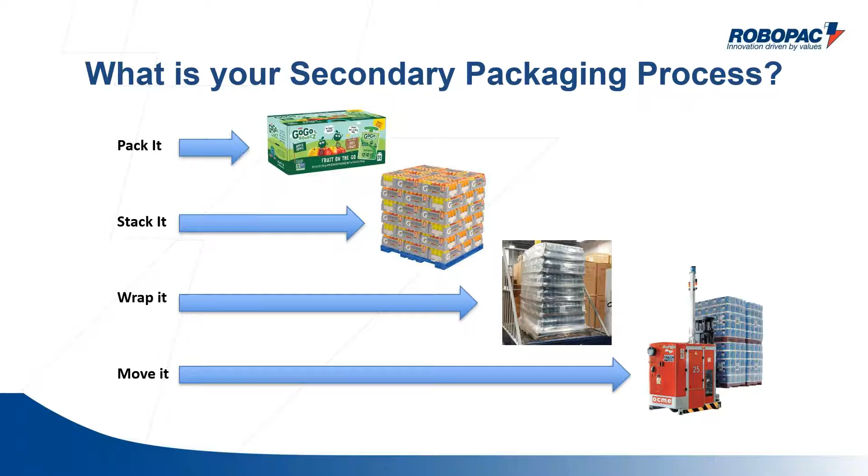In each one of those categories, I'm going to show you some features we've tried to incorporate over the last several years to make automation of these processes very flexible, user-friendly, and operator-friendly. So why would we automate case packing?

Case packing traditionally in the US can be done in an RSC style case, a bliss case, a tray, or a wraparound case. A lot of our equipment focuses around the wraparound case, tray and film packing, or film only type bundling. In the past, you could manually pack cases with a large workforce, bringing product, manually placing it into a case, and advancing the case to a sealer. Under today's circumstances, even if you can find the labor, with social distancing and everything else prevalent in this pandemic, it's just not feasible or practical to manually pack cases.

So what are your considerations to move from a manual operation to an automated one? What do you need to be successful? A lot of time when we think about flexible automation, our mind drifts to a robotic work cell that is very highly flexible. But typically what you give away to do that type of automation is throughput capacity, and many of you probably have throughput requirements that robotic work cells may not be a perfect match for. So if we look at a traditional case packing machine, what's important to incorporate to make sure it's flexible and user-friendly?

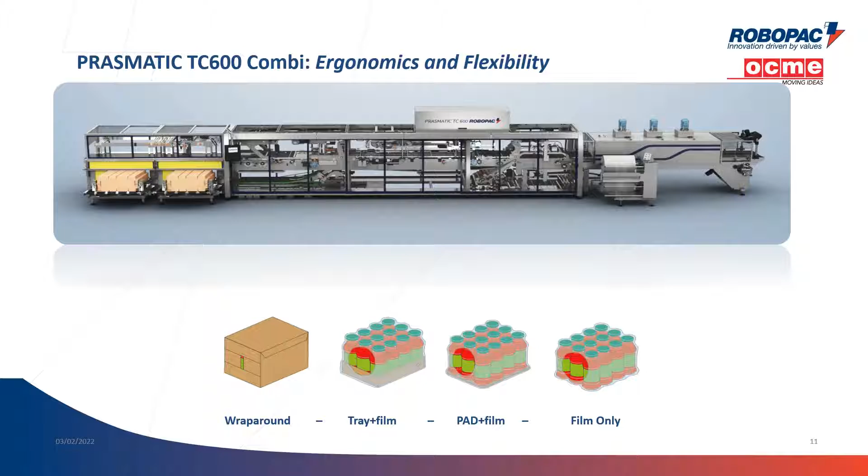I wanted to talk about one machine that accomplishes that, our TC series machine. We call it a combi machine because the combination of formats it can run is very wide. A machine like this can run not only a wraparound case, it can run a tray and film pack, a pad and film pack, or a film only pack. This machine can run all those formats without needing multiple dedicated machines, and with a servo changeover, you can accommodate quick changeovers from one format to the next.

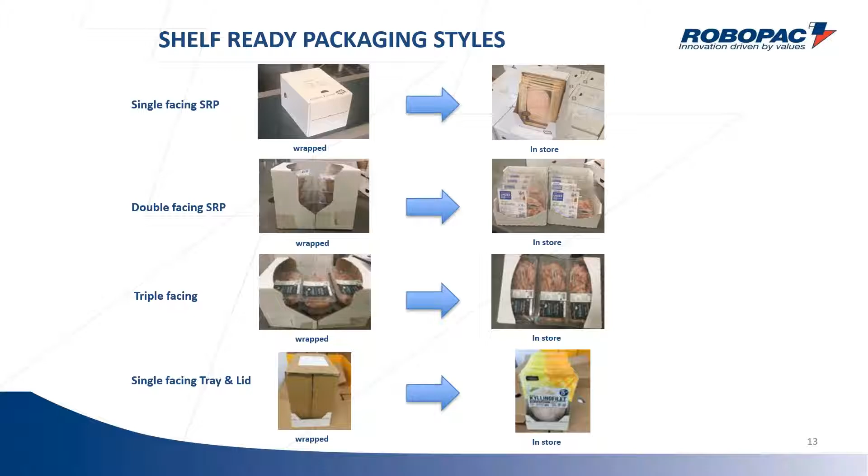The other thing we've really been pushed to do in these wraparound type case packers is provide shelf ready packaging. That seems to be a big push, and I've worked with several people in your industry looking to provide their customers with these shelf ready type packs. Just to give you an idea, here's a nice 3D animation of how this machine is designed and some of its design features.

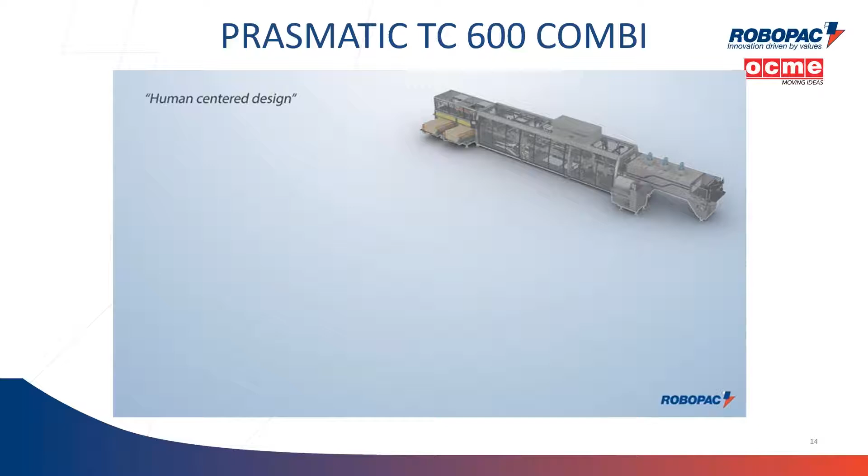About 6 years ago, we really sunk our teeth into this concept of flexible automation, so we made the machine more user-friendly. Things that were very simple in design but made a huge difference, like widening our machine frame, which we did to accommodate some automation but also to make it easier for operators and maintenance people.

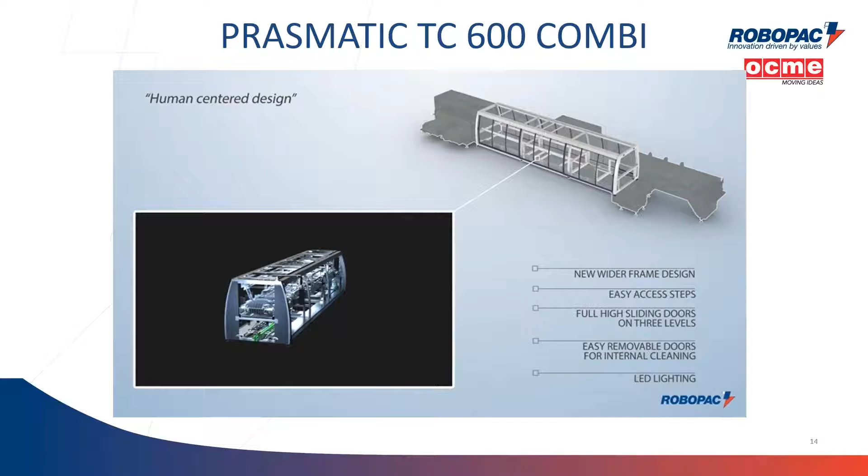Simple things like putting steps inside the machine for better access, and full-length sliding doors that open all the way to expose two-thirds of the machine for maintenance in food and beverage environments, making those doors easy to take off for cleaning. All the machines have LED lighting too, because even in a very bright, well-lit factory, the inside of a machine can be dark. All these things help operators and maintenance people.

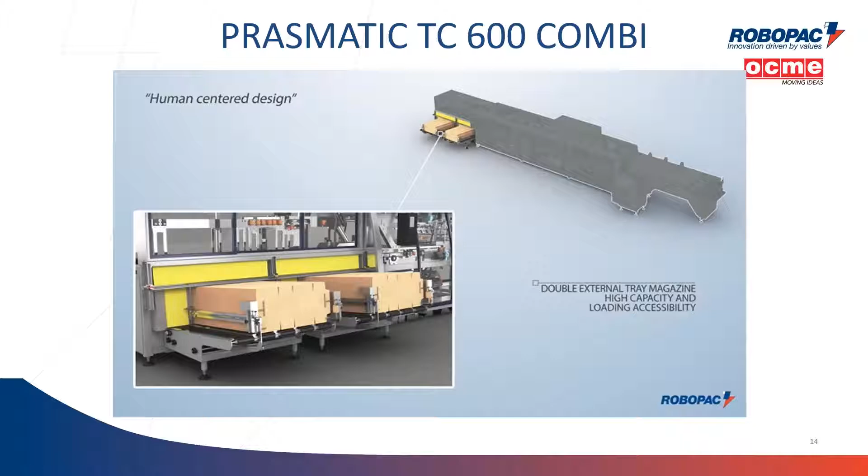We also looked at how blanks are fed into the machine. We use a 90-degree dual magazine that allows you to put blanks on the machine as it's running.

Taking the film rolls outside of the machine and providing a system for automatically splicing film tails, you don't have to stop the machine to change rolls of film. As one roll expires, the film tail is welded to the new roll.

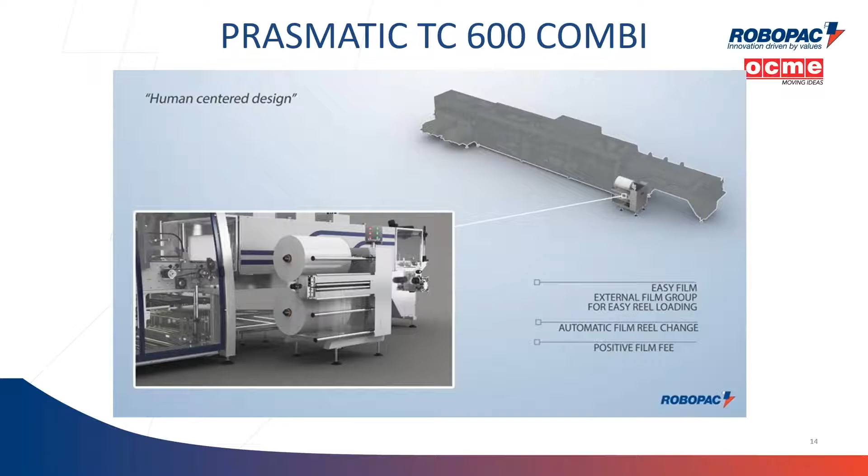All of that is controlled with servo motors, so you have precise tensioning of the film, again making it user-friendly and maintenance-friendly.

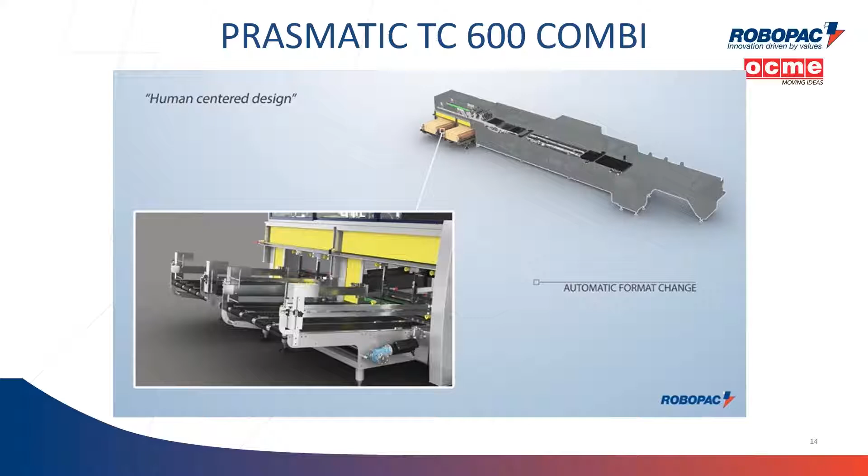There are a lot of changeovers to be made when you're running multiple formats, so we incorporated a servo-driven automatic format change from the HMI.

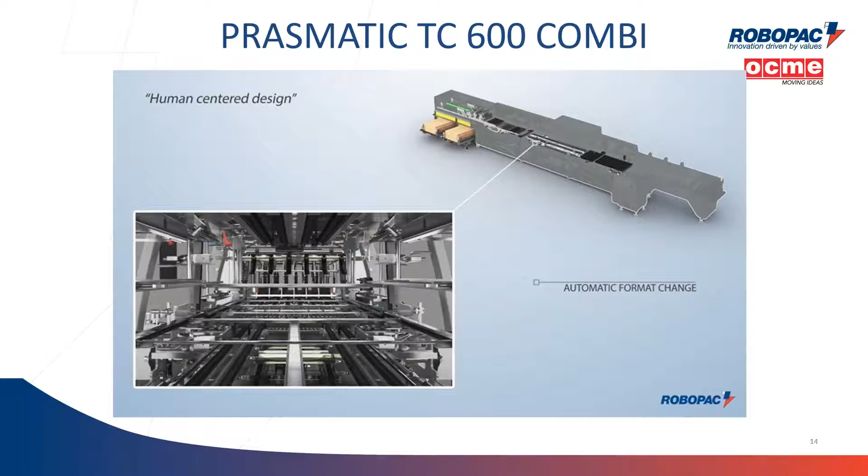We can control the magazine dimensions, the channels or lanes the product goes through, the widths and height dimensions, and the pitch of the chains, depending on your product size. All of that is programmed in advance and called up with a touch of a button.

One of the other things we do: all machines have wear components on a packer like this. The knife that cuts the film is one of those. We put it on a THK guideway system so it can be pulled external from the machine very easily and changed in a rapid amount of time.

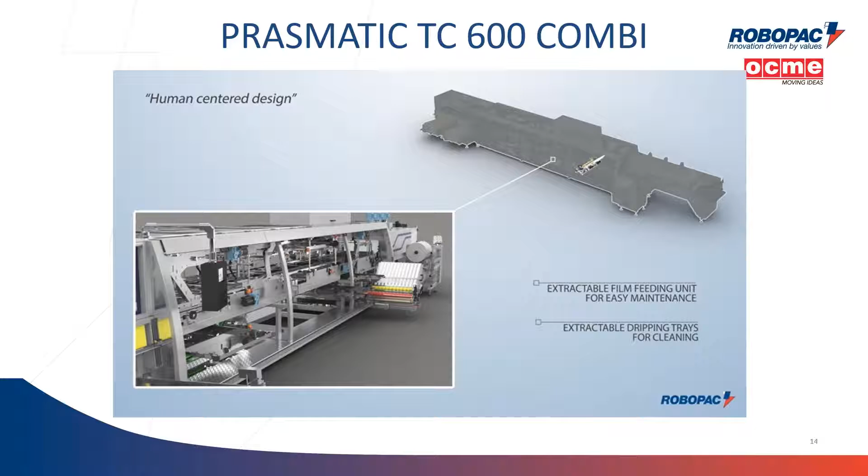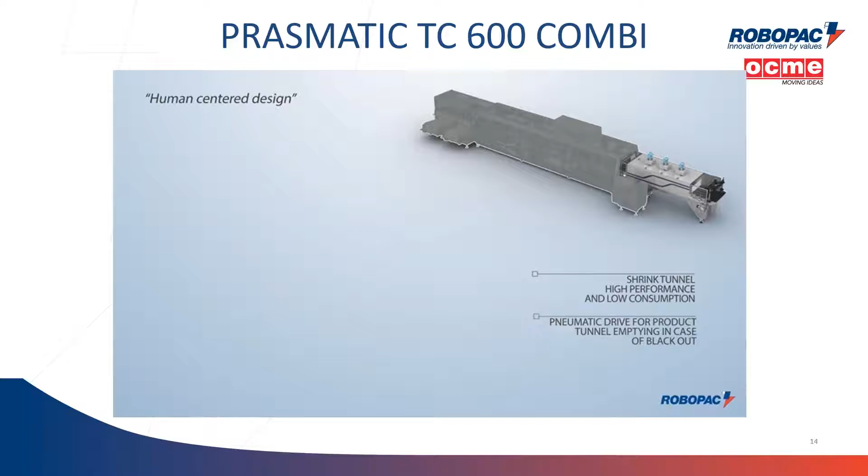So again, the flexibility we're talking about is the flexibility of formats and the flexibility of ease of use. This particular machine has a very high efficiency tunnel with a pneumatic motor that will kick on if the machine happens to lose power, so you don't have any problem.

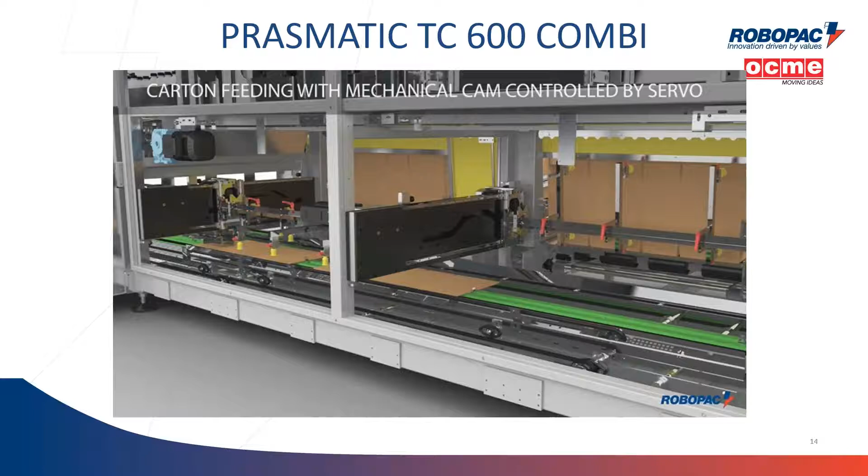As we watch the rest of this video, we'll see a servo picking device picking, alternating from the two different blank magazines. This first segment shows the machine running a wraparound, a full wraparound corrugate case.

Then with a quick changeover, we can go from a full wraparound case to the next format we're going to take a look at here, which would be our tray and film type format.

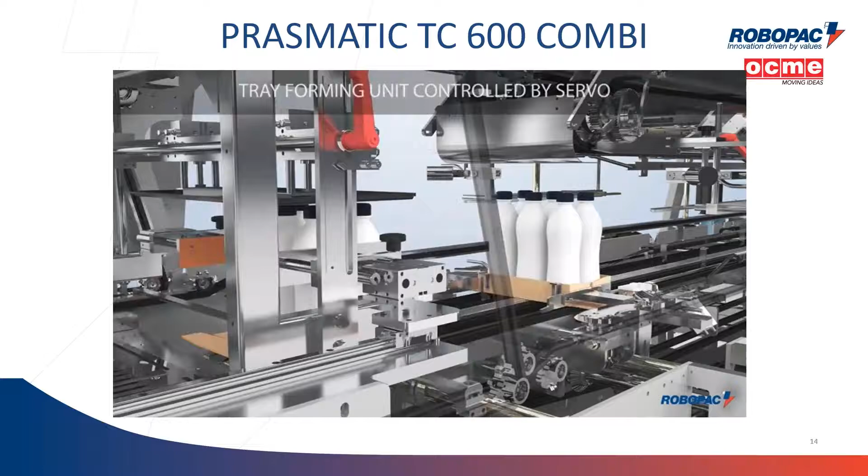All of these formats are very, very popular in the food and beverage industry in particular. Now the same machine that ran a full case is running a tray with a film overwrap.

And then to take it one step further, we can run the same machine with a film only bundle. So smaller bundles, possibly in film only, can be run on these machines as well, all with a matter of a servo changeover.

When you run to a film only, there is a manual adjustment of adding some bed plates for support, but still a very, very quick and reliable changeover.

That allows the flexibility of changing package formats multiple times in a day without stopping down the lines for hours at a time trying to make a format change, or having multiple lines that would eat up a lot of footprint in your shop with different machines for different functions.

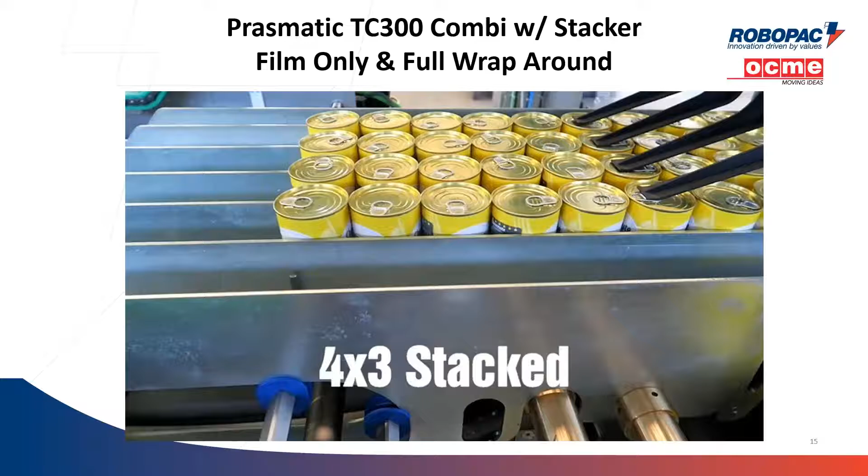So what I wanted to show you, we saw a 3D animation. I'll go through these videos just to show you real life applications. This is a combination machine showing, first of all, a steel can.

This is unique. This is a steel can in a wraparound case, but as you can see, we're going to stack two layers of can. We use a magnetic stacker to stack layers of cans and then run it through a wraparound case like we saw on the 3D animation.

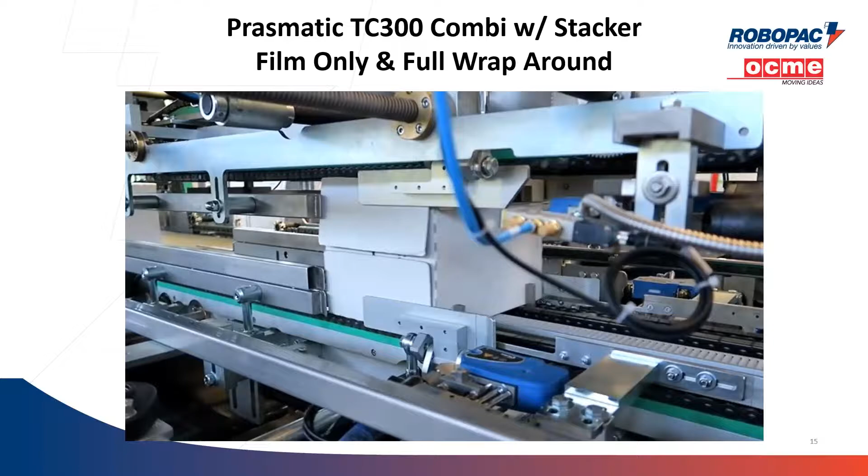The next part of this video, after it shows us completing these wraparound cases, we'll see the flexibility of the machine going from a big, heavy, double stack 4x3 steel can to now a dual lane, single 3x1 with a film only.

So you see here we have individual cans coming, and we're separating them out into two channels of 3x1 with a film only. So on the same machine, we have the flexibility of running a big, heavy wraparound case and then maybe a shelf ready or a retail bundle.

And this can be with clear or printed film.

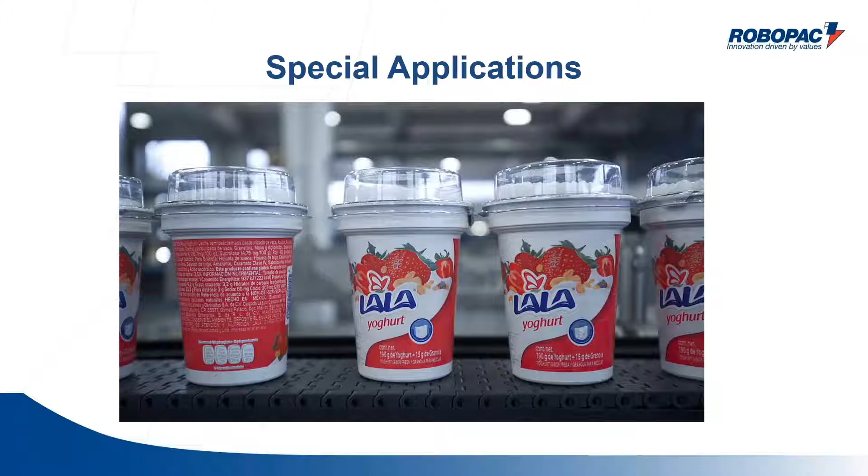I wanted to touch a little bit on the flexibility of these machines. As they're standardly configured, you have a lot of flexibility, but we also have special options for different kinds of functions. This is a dairy application.

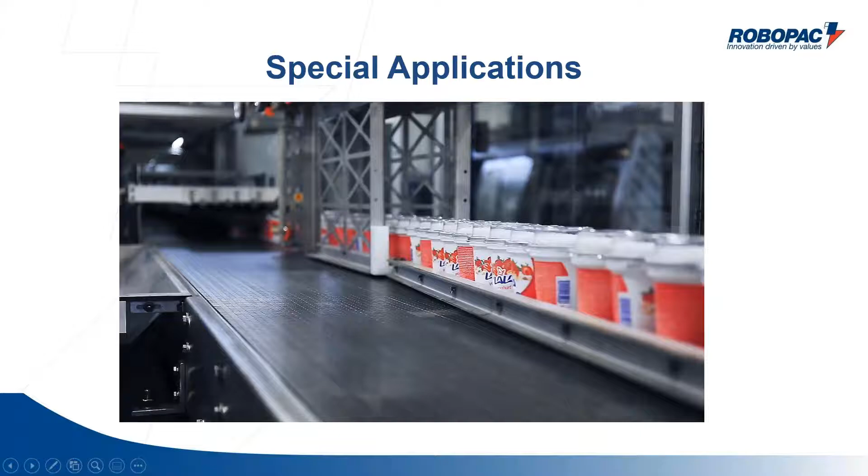It's a dairy application, and you see some laning of a product that could be very difficult to handle. These type of tapered cups can be a problem for some people, but we have solutions for the material handling of these difficult products.

And this particular video shows a nice application, again, of stacking. We're making a separation using electronic separation fingers. We come in, and now this is a pad and film that's double stacked and then wrapped with shrink.

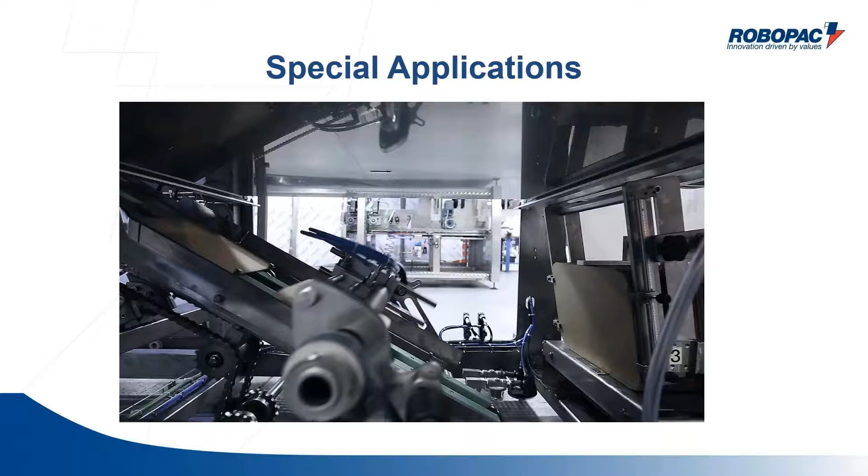So again, just showing you the flexibility of the system here, that you can equip these machines to give you the utmost in flexibility for food, beverage, home and personal care type packs. Hopefully meeting any challenges that your customers might give you.

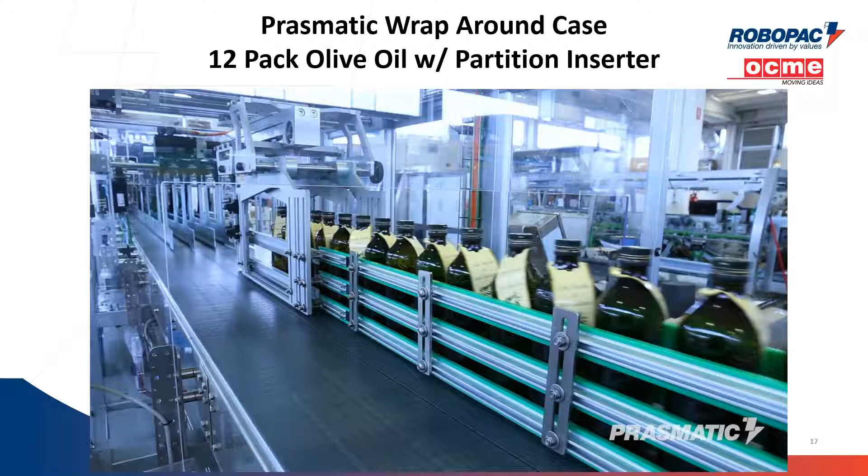Another option that's available in this series of machine to add flexibility is partition inserting. Some customers demand a partition to protect the product internally.

In most cases, this is a separate machine with not a lot of automation, and it's usually a pretty big changeover. But in our machine, we can insert a partition inserter right over the infeed of a wraparound case packer. As you see, we're picking from a magazine, opening the partition, and dropping them in the package format before it goes into a wraparound caser, which you'll see here in just a moment. Again, all one machine frame, relatively compact in design. You don't have to worry about having an erector and conveying and a packer and conveying and then a sealer. It's an all-in-one solution with maximum flexibility.

These machines are available in throughput capacity - that's the other flexibility I wanted to talk about - anywhere from ranges of about 30 cases per minute all the way up to about 80 cases a minute in this series.

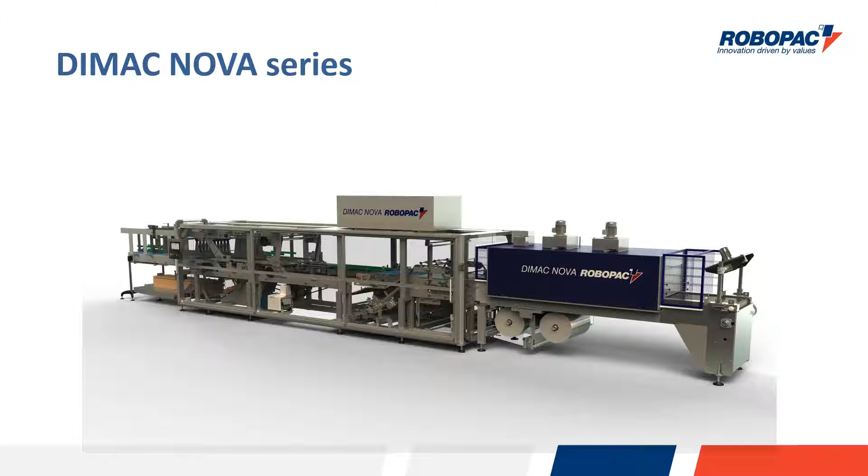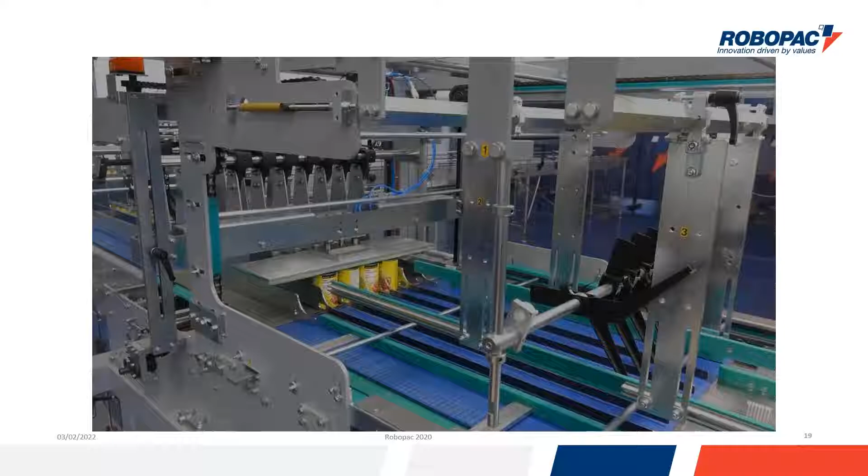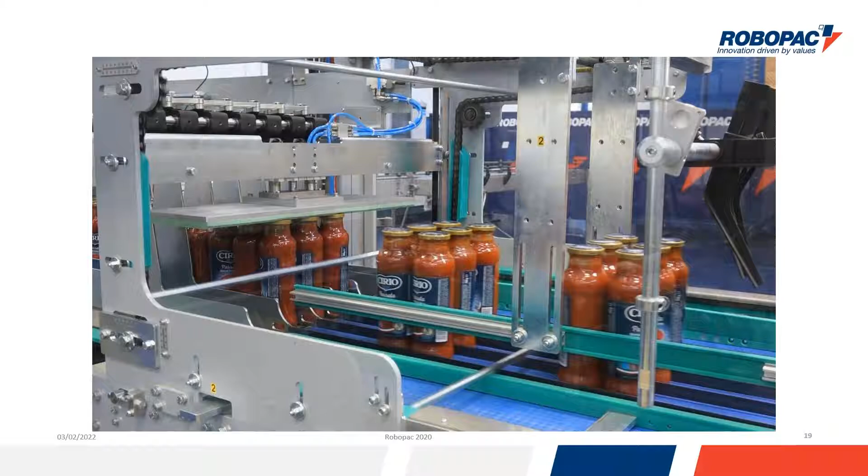Maybe you don't need all that flexibility. Maybe you never get asked to do wraparound cases or whatever. There's also in our standard bundling machines a lot of flexibility built in. This is a quick video that shows just an idea of the flexibility of packs that can be run in just our standard bundler machine. This is a tray and film machine, showing everything from steel cans to glass bottles to PET bottles. Again, these machines are available with complete auto servo changeovers for very quick and reliable changeovers, which allows you to be flexible to run small batches at high throughput capacities. So just to give you an idea, even on a machine that's not what we call our combi, there's a lot of built-in flexibility.

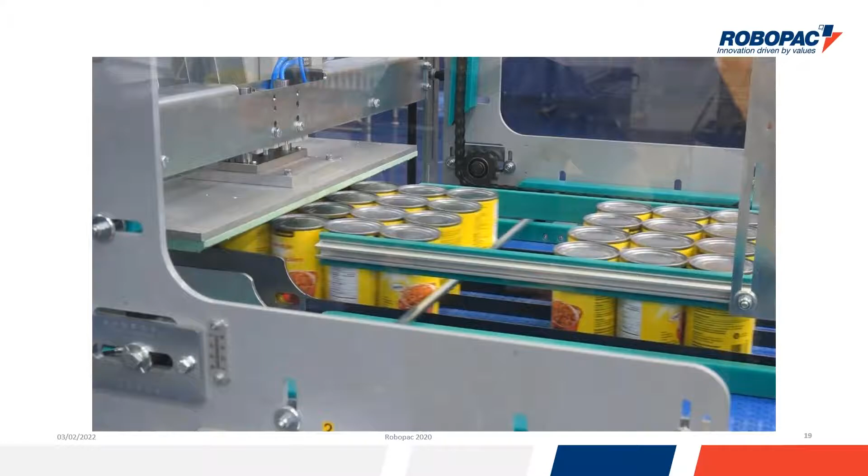That brings us to the next step. We talked about packing it. Now we're going to talk about stacking it. This is an area that in the last 2 years has grown tremendously for us. It's an area where a lot of people were doing palletizing manually. With the shortage in labor, we came up with some ideas to make our palletizers flexible, easy to use, cost effective with small footprints, and I'll share those with you.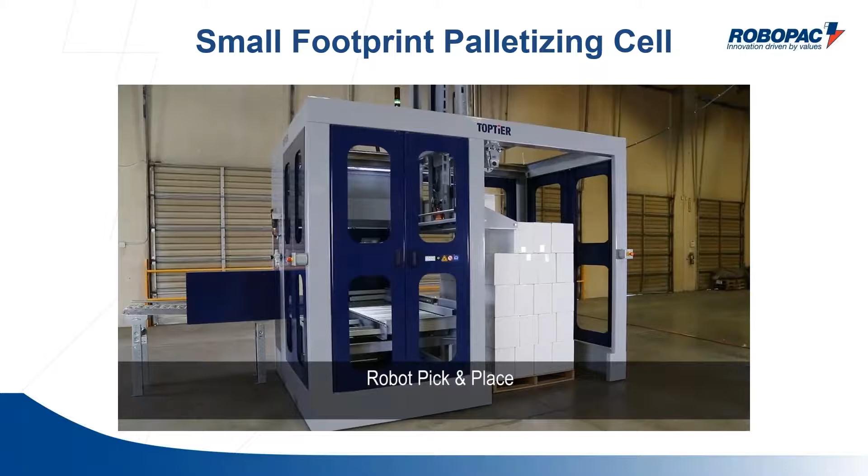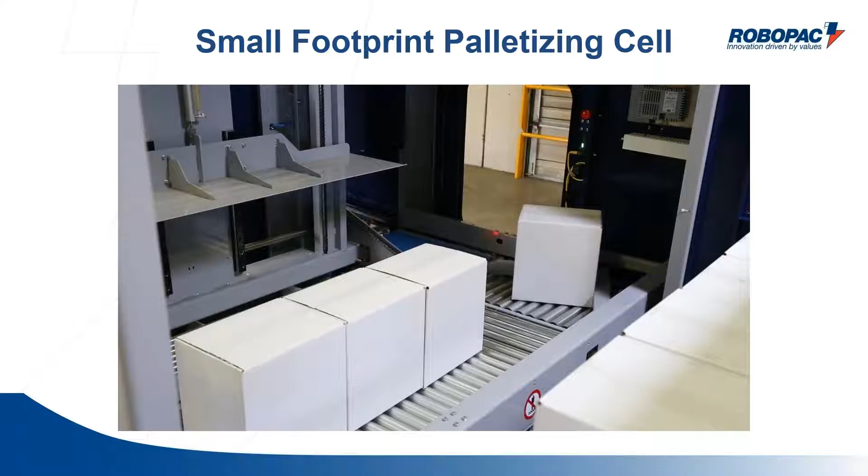The first thing I'm going to show you is kind of a result of market demand. Companies that have very slow producing lines, but they don't want to manually or can't manually palletize, but they don't have room for a traditional palletizer that's got a huge footprint and costs a fortune. So we came up with a machine that is a very small footprint machine. This is called our pick and place. Basically, it's an 8 foot by 10 foot footprint. It would go at the end of a line. It's up for about 10 to 12 cases a minute. The idea would be that you can automate a palletizing situation that in the past may have taken a much larger footprint and a lot of extra money. This is a very affordable solution, coming in at just around $100,000 for this type of solution.

But you see some of the advantages - we're handling cases from the bottom, which also lends to flexibility. We don't have to worry. We could be doing unwrapped trays, and because we're supporting the product from the bottom, we can pick them and stack them. Whereas if you're locked into something that's picking the cases from the top all the time, that could be a problem and limit your flexibility of cases that you can bring into the machine. Again, small footprint flexibility, flexibility of cases that the machine will handle.

The other type of palletizing flexibility that we've designed is palletizers that actually do multiple functions, not only palletizing, but stretch wrapping at the same time - what we call concurrent stretch wrapping. A machine like this is a very small footprint, a very affordable price. The footprint on this machine is about 15 feet by 18 feet. What this machine does is it concurrently stretch wraps, and what that means is as we're building product layers, we're actually stretch wrapping those layers as we're building them.

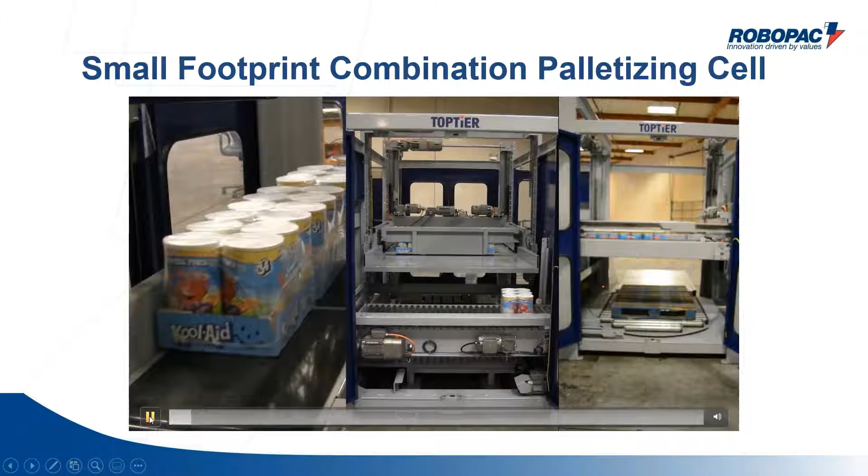And I'll show you a video of that. This video is kind of unique - it's actually done in 3 frames. The product infeed is going to be shown on the left. The product coming in and where we're building rows is in the middle, and then the layer deposit and stretch wrapping is on the right-hand side of this screen. So all 3 screens will be running at the same time to illustrate what concurrent stretch wrapping, the flexibility of concurrent stretch wrapping, is. So you notice over here on the right screen, we just dropped a layer.

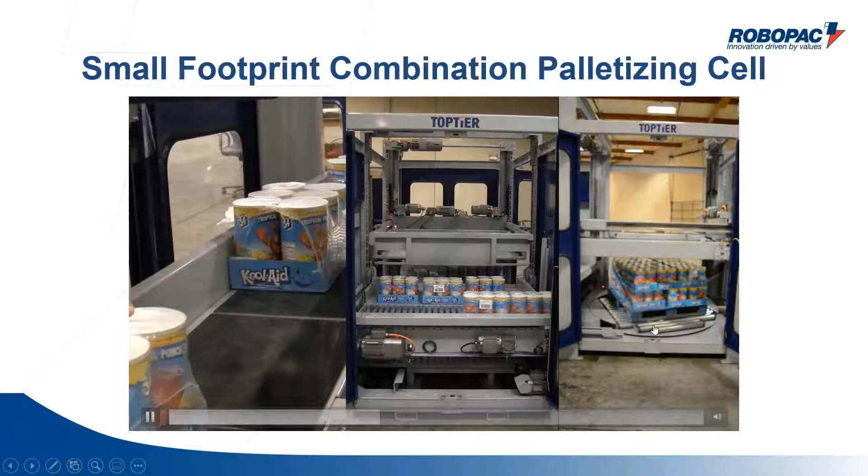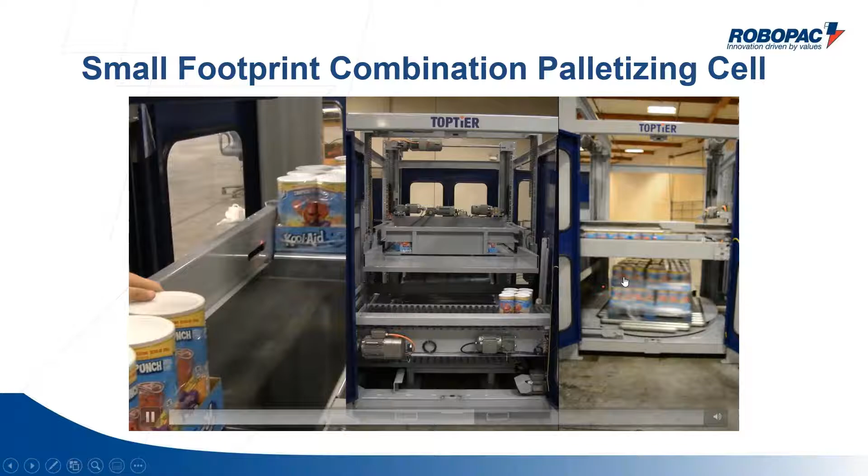You'll see some stretch film being blown from the stretch film head and laid on top of the first layer. As we're getting ready to drop this next layer, the infeed is still working, rows are still being pushed out to a layer head, but we're stretch wrapping as it's going on. If you look in the middle screen behind the layer head, you'll see that palletizer wrapping - we've broken it out to the right where you can see it more clearly. But all that activity is going on at one time.

The benefit here is that you have the flexibility of multiple different layer patterns without the possibility of them separating or falling apart when they exit the machine unwrapped. You're wrapping them as you are palletizing layer by layer, so you're going to have a full pallet build ejected from this machine, totally stretch wrapped, so it can go directly to storage or be loaded on a truck. The idea here is providing the flexibility of a very small footprint machine that combines functions to get the most flexibility out of it.

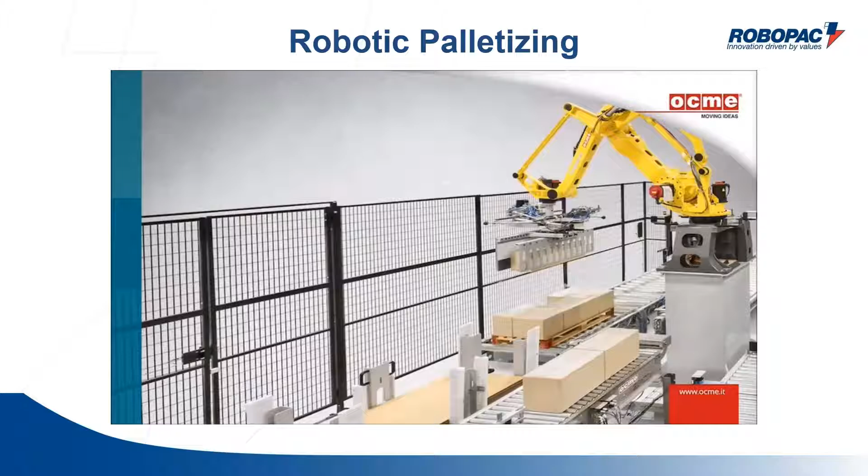I talked earlier about robotic work cells, and there is one area that we do a lot with robotics, and that is palletizing. What you've seen so far, the 2 palletizers that I've shown, are very good for single in feed - one SKU coming into an area where we're going to build a pallet out of that one SKU, or one in feed and one pallet build station. Many customers want the flexibility to run multiple lines into one palletizer and not have a dedicated palletizer for each line. In that case, we can offer robotic palletizing.

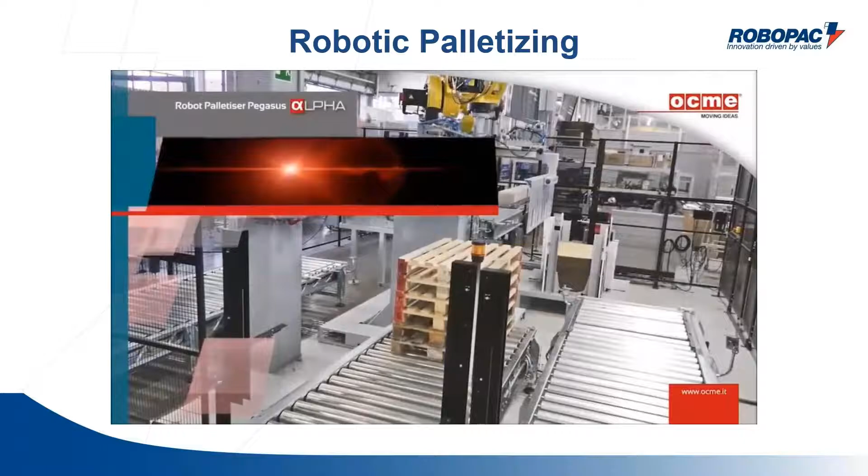Typically, robotic palletizing comes into play when we do have those multiple in feeds coming to one palletizer. This is a nice video that shows an illustration - 2 product in feeds, 2 different SKUs, 2 pallet build stations. And then we have stations where empty pallets are coming in.

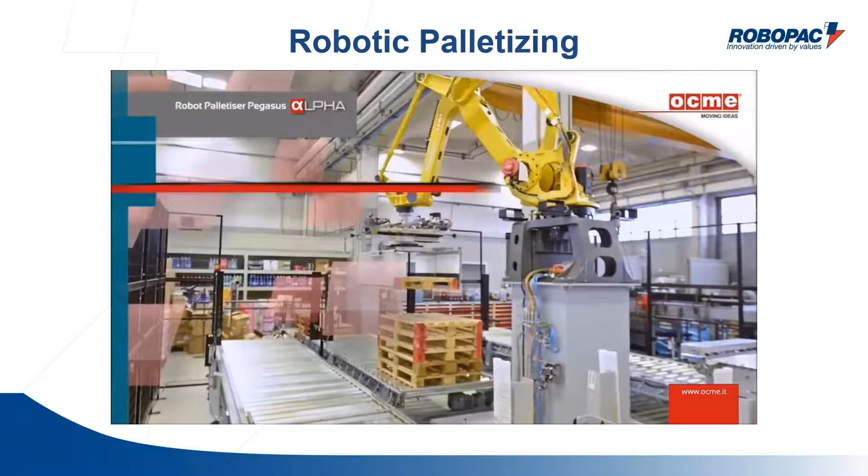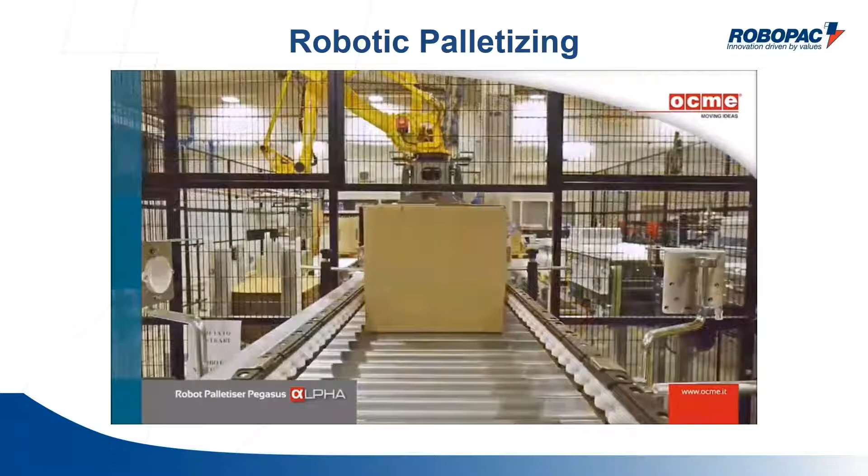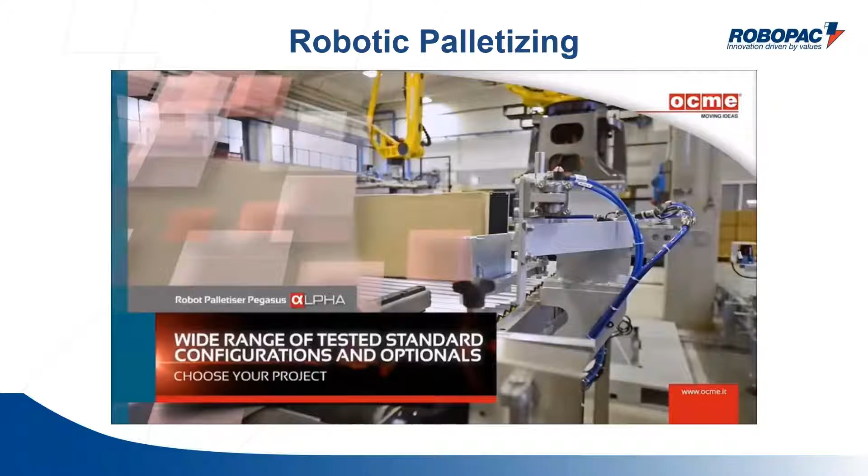A lot of times we like to use a mechanical style gripper, where we have positive case picking, but also where we can pick our pallets. We equip these with vacuum devices where we can also pick slip sheets to go in between the layers of the pallet. Depending on the type of throughput capacity needed, we typically would pick either rows for higher throughput capacity or individual cases for slower throughput capacity.

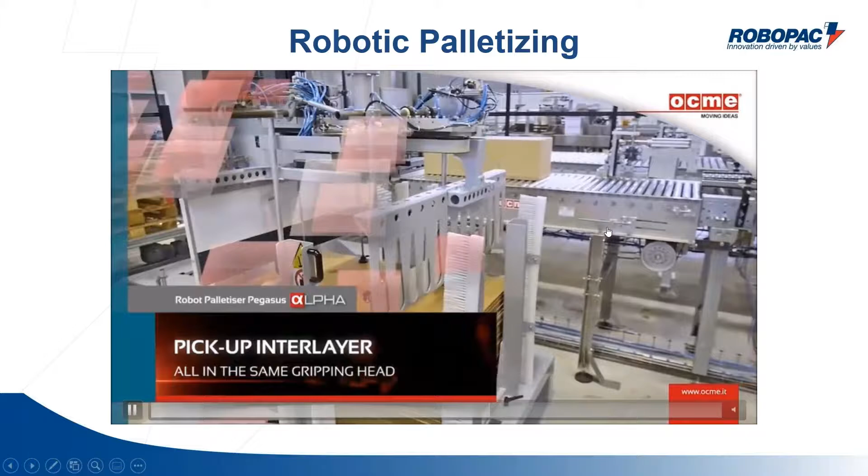So we've talked about packing it, we've talked about stacking it. Now we'll talk about wrapping it. Stretch wrapping is something that no one really likes to do. You have to do it to transport your product and get it to its destination in good order. A lot of people still like to hand wrap. That's becoming less and less prevalent as we have labor shortages, and it's the worst job in the factory to hand stretch wrap, I think.

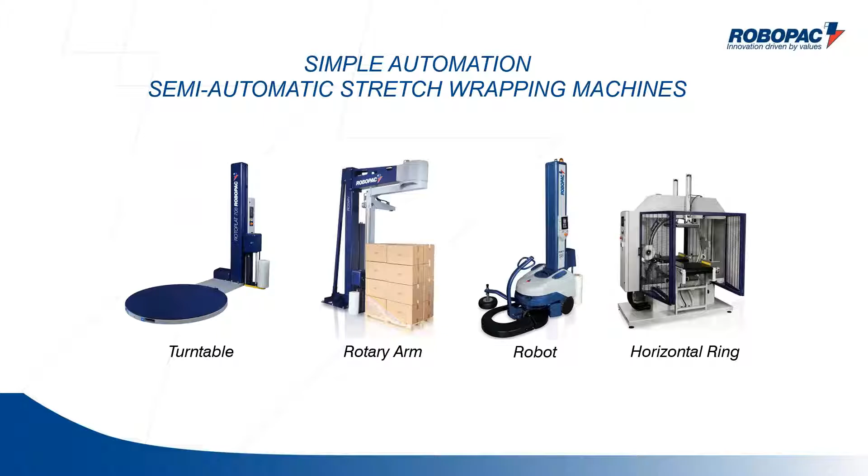So there's a couple of ways we look at automating the stretch wrapping process, and it could be very simple automation. A lot of you guys are probably very familiar with most of the pictures here - turntable style stretch wrappers, rotary arm style stretch wrappers, maybe horizontal stretch wrappers for bundling products together, or the robot, which is a machine that's a little bit unique to ROBOPAC - a mobile portable stretch wrapper. I just wanted to give you an idea of this robot stretch wrapper. It's a very portable, flexible type solution.

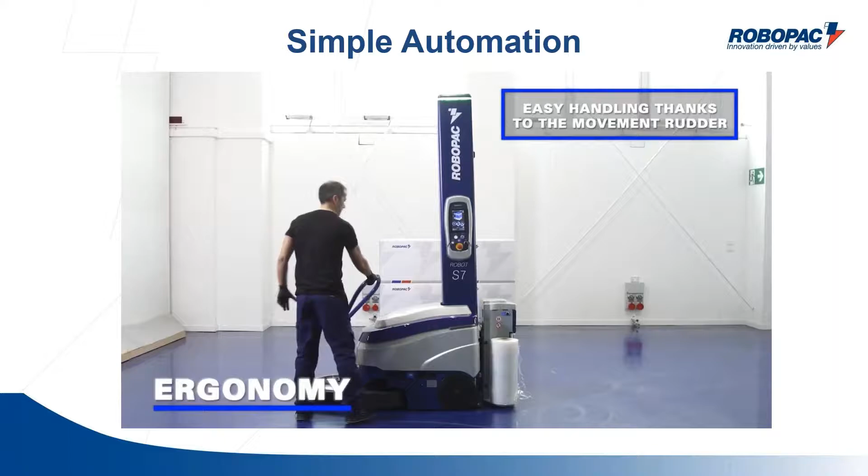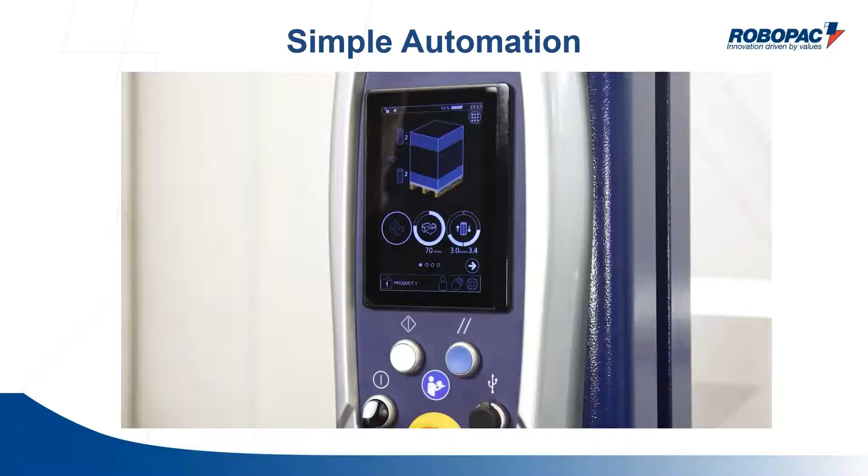One thing I'll talk about as this video is going is what we do at ROBOPAC. We've got a patented technology that allows us to vary the pre-stretch and the containment force through our film delivery system, which allows us to save about 20% to 50% on film consumption. It allows us to make sure we're wrapping each layer with the proper containment - strategically putting containment force on a pallet. We have here in Georgia a large tech lab with shaker tables and acceleration sleds, and we test these type of claims out all the time.

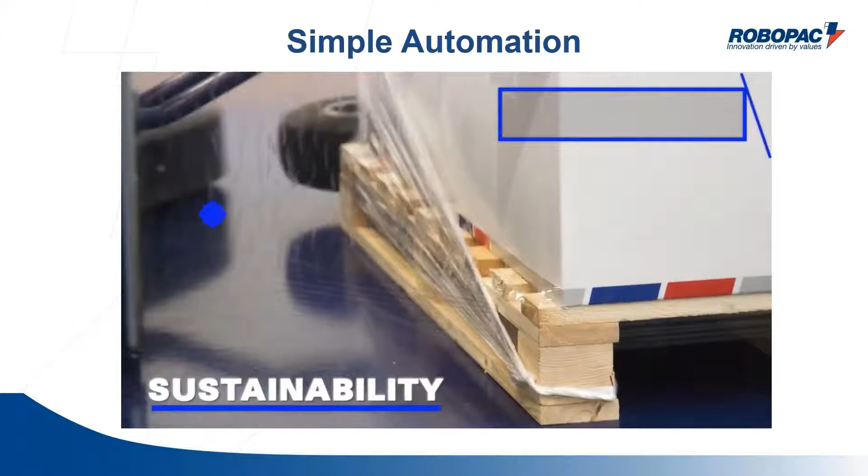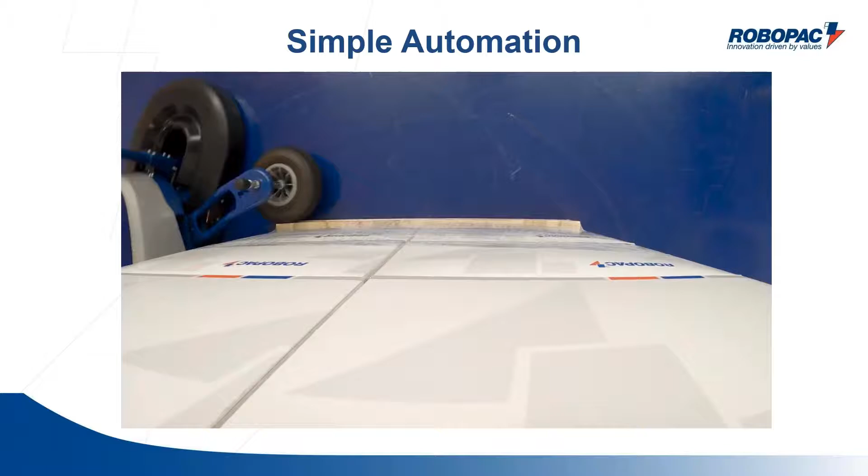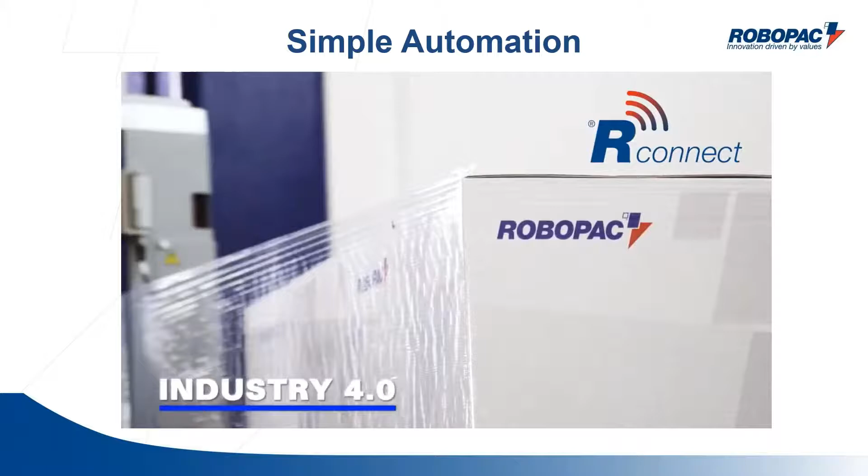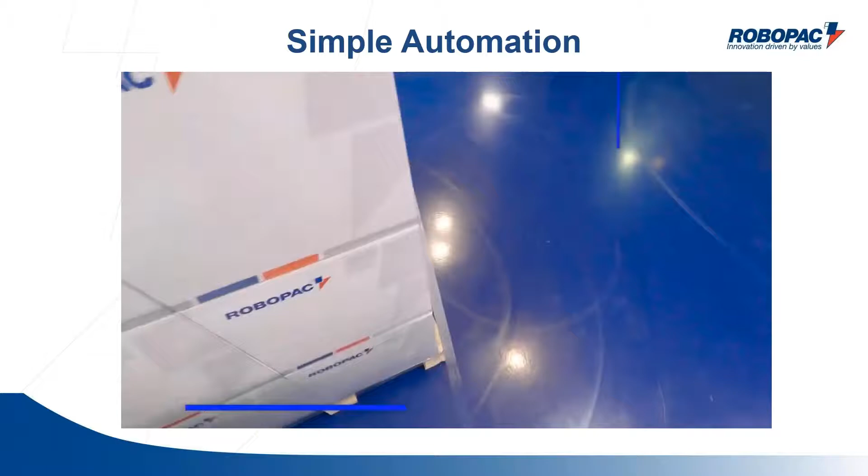What we found out is this type of stretch head that we use allows you to save or use less plastic on the pallet and still get the same containment force. This not only helps customers with the bottom line by not using as much plastic, but we have several large Fortune 50 type food and beverage companies who've requested this style of stretch film carriage to alleviate sustainability concerns from their sustainability committees. They think if they can reduce the amount of plastic going on a pallet by 20 to 50%, that's a way to reduce plastic out of the waste stream.

So that's a nice clean video of this mobile robot that you drive to the pallet load, attach the film, and let the machine wrap automatically while the operator's doing another job, so it's done in mask time. But I wanted to show you a real life example of this flexible technology in action.

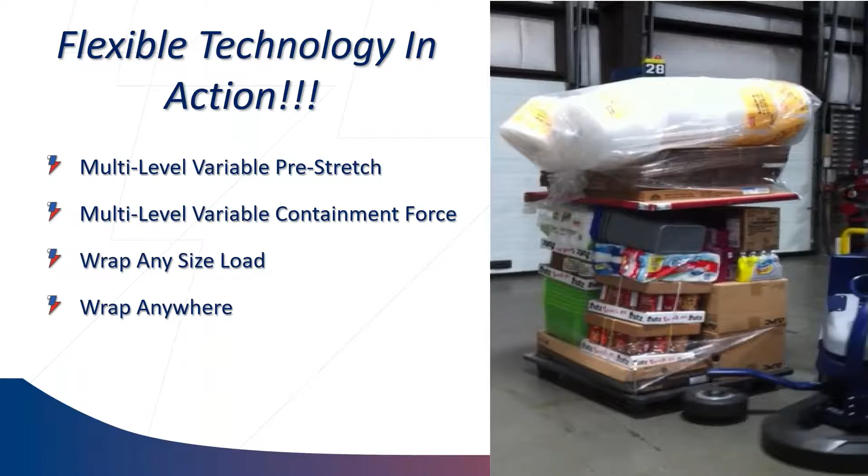This is a large national office supply company in one of their distribution centers, and you can see the type of load here is very difficult to wrap. There's heavy products and light products. About two-thirds of the way up, there's a big whiteboard sitting on top of the stack, and then at the very top, to make it even more difficult, there's a really lightweight bag of bubble wrap.

So this technology of the film carriage with variable pre-stretch and variable force to load allows us to wrap any type of load, even ones that would normally be very prone to being pulled over by the force of the stretch film on the load.

What this allows us to do is ramp up the pre-stretch of the film to a very high level and apply the film at a very low tension on the way up, so we tack all the product together, making sure we have it wrapped correctly so it reaches its destination. Then you'll see here we start to put a little bit more force on the load, but the load doesn't fall over because we've already tacked it down with light force.

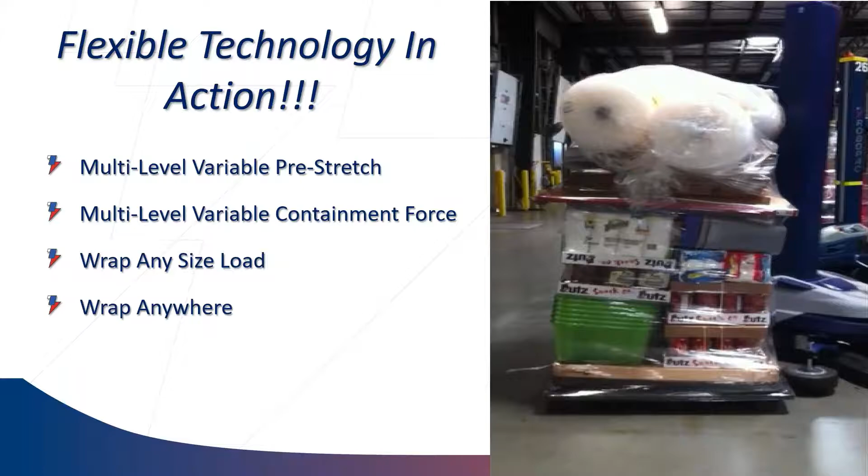So again, the ability to wrap any size load, wrap anywhere in the factory, eliminate hand wrapping, and save a lot of money on film. It's another example of some very simple, very cost-effective automation that could be put in your production facilities.

When you also talk about wrapping it or stretch wrapping, you talk about fully automated systems. There is a great demand to match up or pair up with high production lines, automatic stretch wrappers, receiving products from high performance palletizers and needing to be stretch wrapped.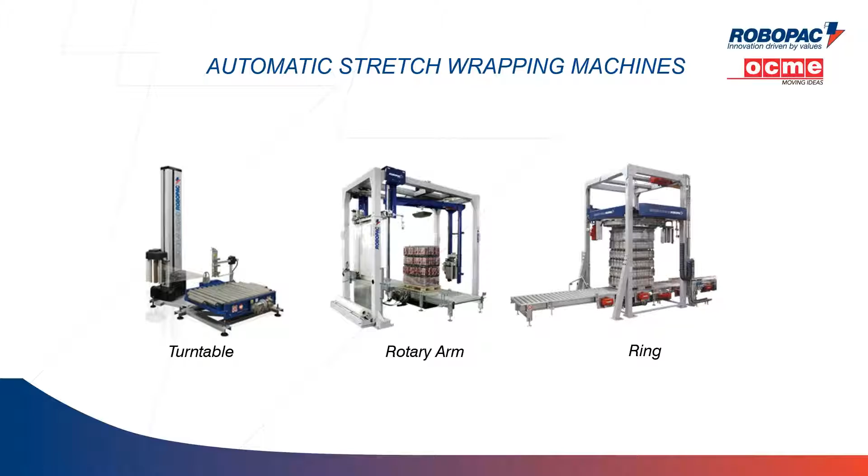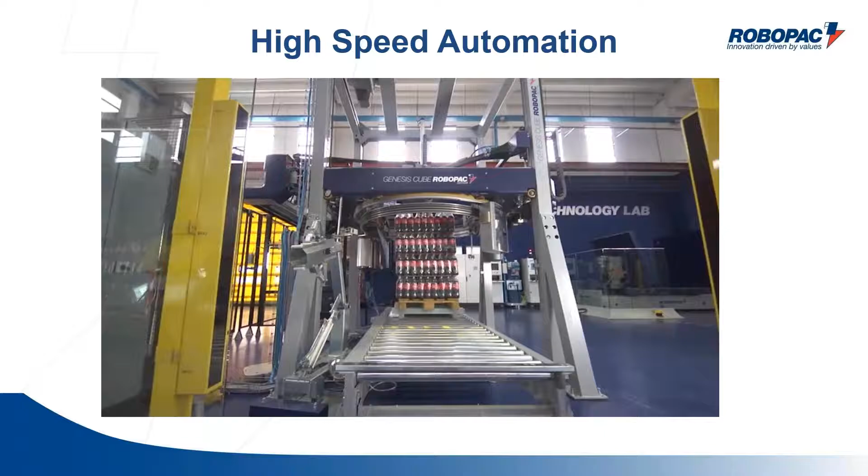So in that regard, we've tried to make these machines very user friendly, very flexible in what they do, with a lot of features that make sure we're going to be able to provide the specific wrap pattern needed for a particular type of product to make sure it gets to its destination in good order.

This is what we call our rotary ring machine. It's our highest throughput capacity machine, able to wrap up to about 200 pallet loads per hour. We have machines starting at about 20 pallet loads per hour all the way up to this 200 pallet load per hour mark. You'll see some things in this video that are unique.

We have the ability to make what we call a waterproof load by applying a top sheet of plastic on the load as we wrap it. We can make sure that we always capture the pallet with film, securing the load to the pallet by incorporating a pallet lifter, so we can get the film down onto the pallet. A lot of these are very simple ideas, but again, they allow us the flexibility to automate.

You see here, there's a little something that looks like a cord or a rope. We can apply pressure to the web of the film to cause what we call a roping effect, which locks into the wood of the pallet and locks your load onto the pallet. Or you can apply that rope all the way through your product to act as a reinforcement band all the way up and down, like a belt on the system.

I had mentioned to you about this technology we have that allows us to strategically place film.

So our machine sees this pallet as 12 different layers, and in any one of those layers we can change the machine speed, the pre-stretch, the containment force, the number of revolutions. This allows us to scientifically design a wrap pattern for your product.

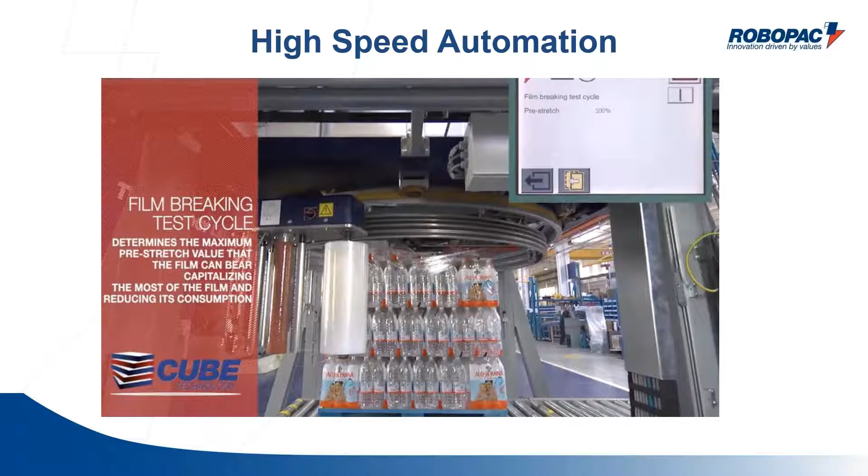This is a nice feature of the machine, the film breaking test cycle. Today we can put a roll of film on the machine and ramp up the pre-stretch in 1% increments until the film breaks. That lets us know for production runs what your film will actually stretch before breaking, so we can prevent film breaks due to overstretching.

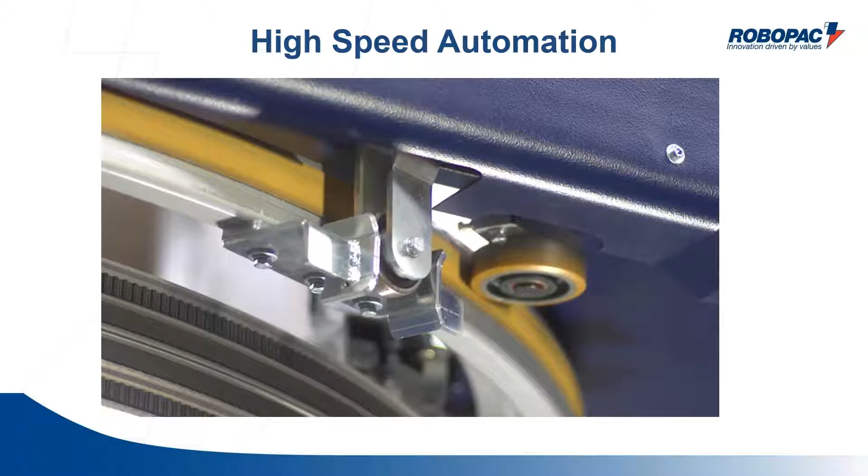The other flexible thing about these machines: if you have high speed stretch wrappers, you go through a lot of film, and you don't want lines down while operators change film rolls. So we can do an automatic film roll change. Once the roll expires, the machine locks into place and a little arm comes in to pick up the old cardboard core. Once that core is deposited, a little garage door opens, and there's a roll of film sitting on a film trolley. It comes in, engages with the machine, and the machine picks up a new roll of film and starts wrapping again. The whole process takes about 1 minute and 15 seconds, done autonomously without anybody there—giving you more autonomous run time without having somebody tend to it.

Moving on to the next part. We talked about packing, stacking, and wrapping, and now we're going to talk about how we move that around.

This isn't about us hiring at ROBOPAC, but what this sign illustrates is that every time I drive by a warehouse, no matter what city I'm in, there's a big 'now hiring forklift drivers' sign on the factory. It's a problem—an area where we've seen a huge increase in demand: how do we replace forklift drivers? At ROBOPAC, we manufacture laser guided vehicles, or autonomous forklifts.

We have a full range, everything from tall reach machines, machines with clamps for handling rolls, double lifts, conveyor lifts, little narrow units to go into aisleways, and basic counterbalance trucks that mimic a standard forklift.

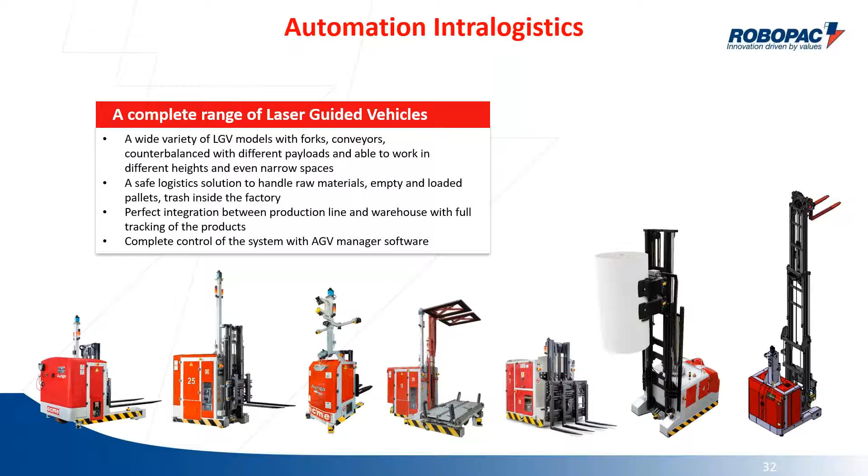Why would we use laser guided vehicles? Studies show they're much safer than a traditional forklift. I'll go into the different safety systems on them, but they're very, very safe. You're going to reduce product damage—you won't have a forklift driver gunning it before the pallet is wrapped and the product spills on the floor, or someone running a corner into a wall.

A lot of flexibility—these machines will do anything a forklift will do. They can work lights out, 3 shifts a day, with no one there. It's an intelligent solution because you get full tracking and tracing. The machine can relay back to your warehouse management system exactly where pallets were picked up from and where they're going, reducing production and warehouse costs overall.

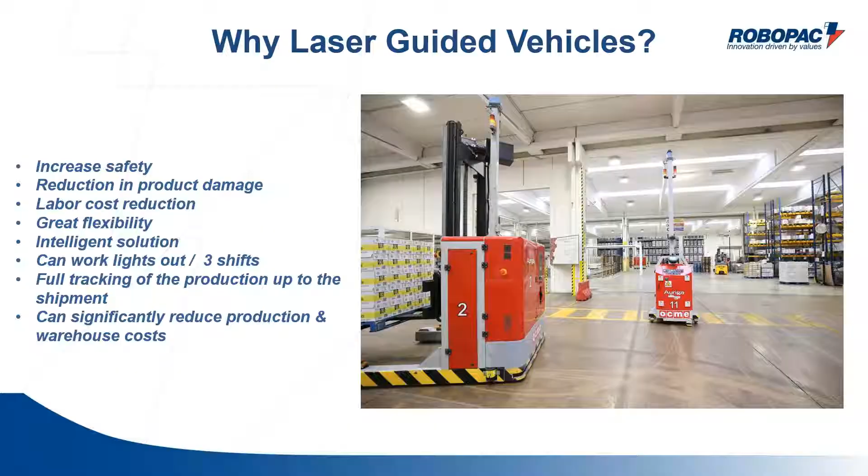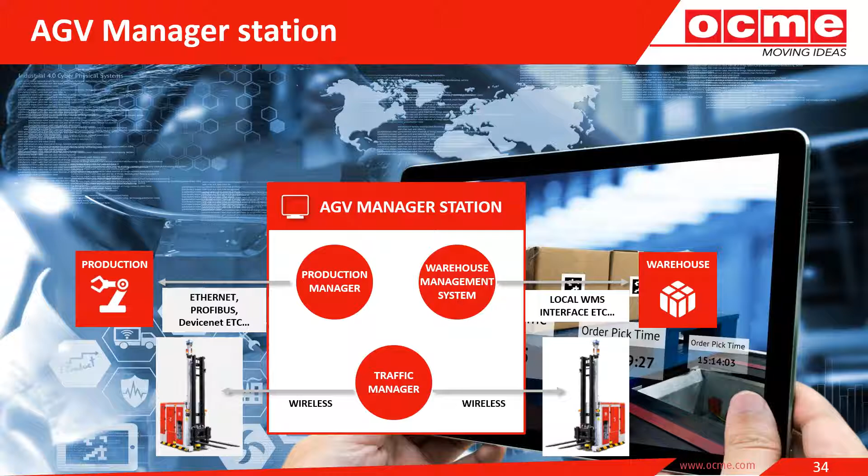So how do they work? They are laser guided—not wire guided on the floor, as people often ask. They work off a manager station incorporating 3 softwares: a production manager that calls the LGV to come pick up a product, a traffic manager that keeps tabs on where all the units are to pull the closest one and prevent collisions, and the warehouse management system, which you may already have in place. All 3 work together to make the system run.

As I said, they're laser guided. We put reflectors around the warehouse so the machine is always scanning for 3 of them to triangulate its position on the floor, giving a very high degree of accuracy—within 1/4 inch, plus or minus 5 millimeters.

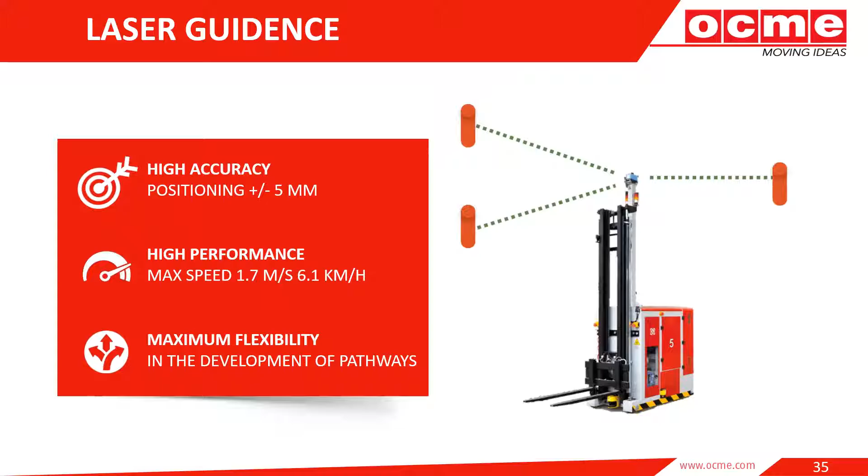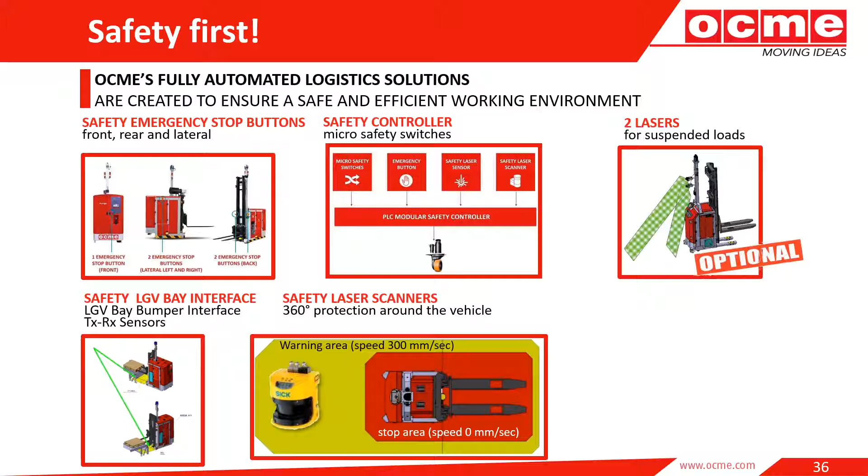The nice thing is once something is out of those zones, the machine just continues on its mission. There's no resetting of the machine or anything. It goes along and does its job as soon as whatever's in its way is out of its way. This is just an illustration of the 360 area scanners.

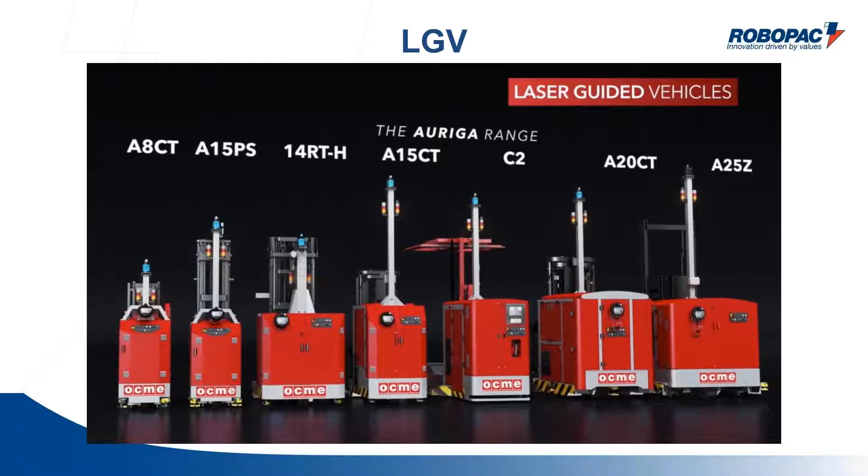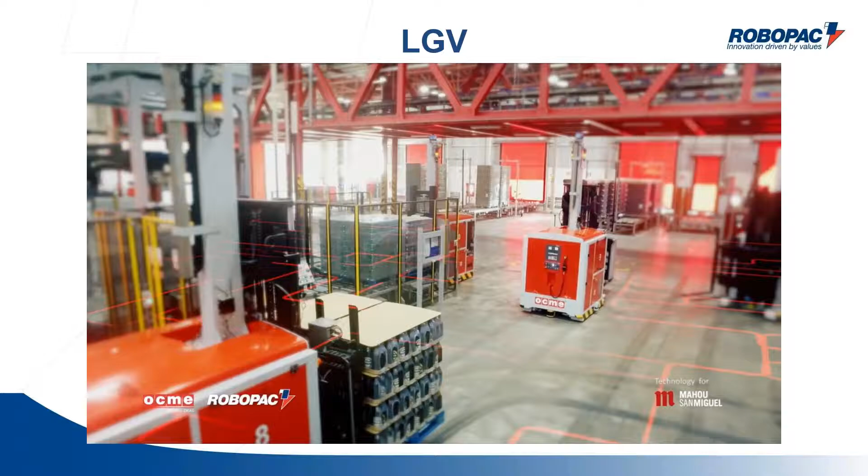Now a quick video showing some LGVs in service. Again, a very large variety of different types of trucks are available. You can see here, totally autonomous. This video is actually at a beverage company.

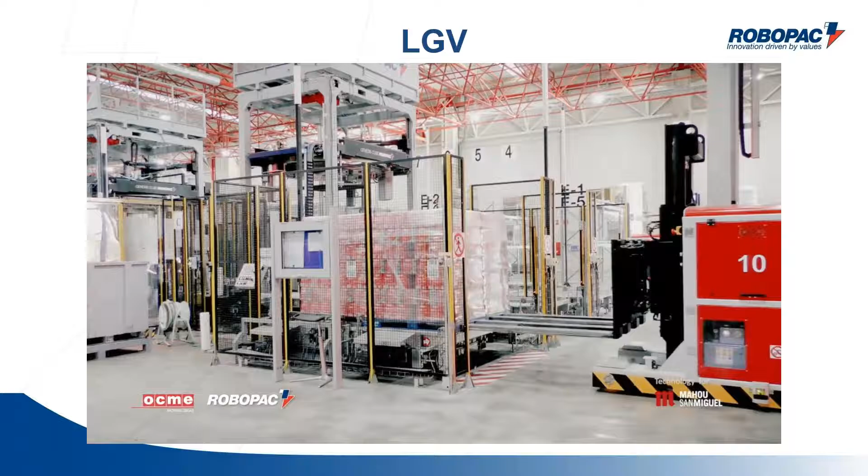Actually, this is a beverage company - Mahou Brewery, I'm sorry. This is almost a lights-out facility. A lot of the machines you see in the background, the robotic palletizers, the stretch wrappers, this is a full ROBOPAC project. So you can see here the flexibility of automation.

You can run a lights-out facility with laser guided vehicles, robotic palletizers, automatic stretch wrappers. This is a double picking up 4 pallets at a time. Again, anything that a forklift can do, for the most part, an LGV can do.

The LGV is a process that requires quite a bit of study on both our customer side and our side. We really need to take a holistic look at what our customers are doing and what they're needing to do, and where the routes or missions would be, so we can calculate how many LGVs would be required. But I can tell you, in the last year, specifically our highest request-for-quote item is the laser guided vehicle.

And it's primarily because there's just not a lot of forklift drivers out there. So with that being said, I think we've covered packing it, stacking it, wrapping it, and moving it.

Hopefully today you've seen some ideas where we can use traditional machine automation in a more flexible way to meet throughput demands that you might have. If you need any more information, feel free to visit our website at robopacusa.com. And with that, I guess we can open it up to questions.